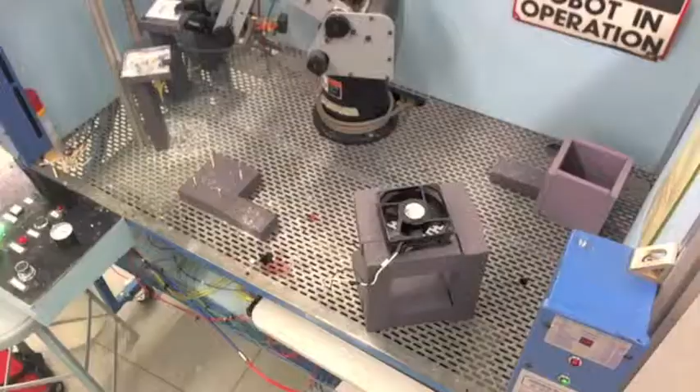Our basic procedure is to press the double-up start, which will pick up the selected mold you choose. Then you take the mold to the wax pouring station, which turns on the air valve to pour wax into the mold. Then you take the mold to the wick placing station, place the wick, and cool the candle with the fan for 1 minute and 30 seconds.

Take that to packaging, then take the candle out of the mold, put the candle into a box, put the mold back on the original spot, and loop back to start. It can run 4 times in a row before wicks need to be replaced, thanks to our variables.

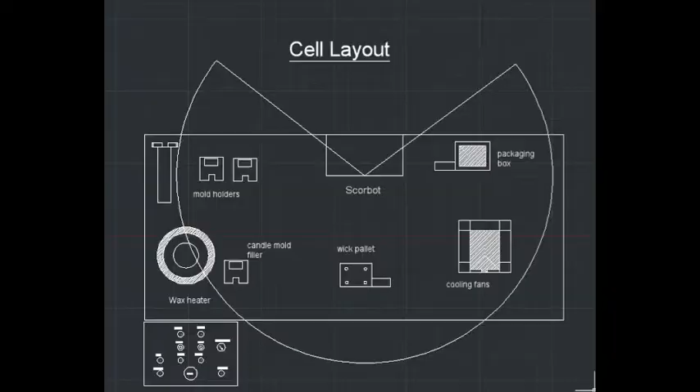Which leads us to the explanation of the Workcell layout. Our Workcell consists of mold holders, molds, a wax heater, wick pallet, cooling fan, and a packaging box. And to cap it all off, we have the control panel and the Scorbot.

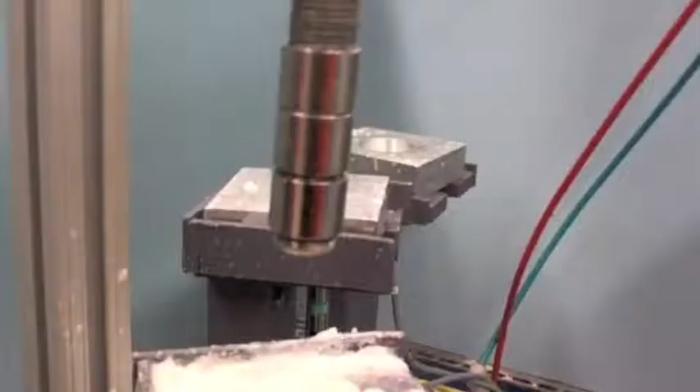One of the first, and definitely main, fixtures of our Workcell is the wax heater. The wax heater heats and maintains the wax to make sure we get the right amount to go into each mold.

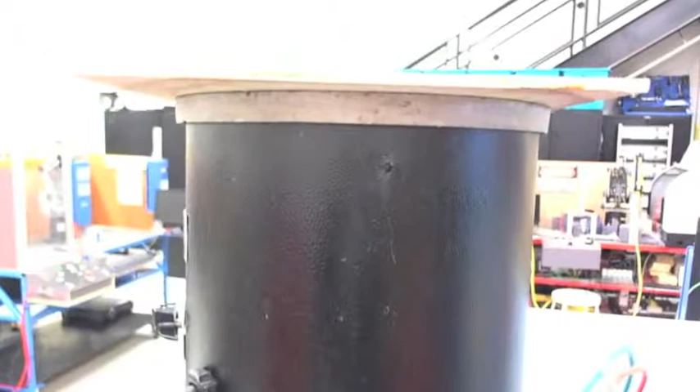As you can see, we place each mold, depending on its shape, on its own mold holder. The aluminum molds that rest on top of the mold holders are square and circle, allowing one to choose their desired end candle.

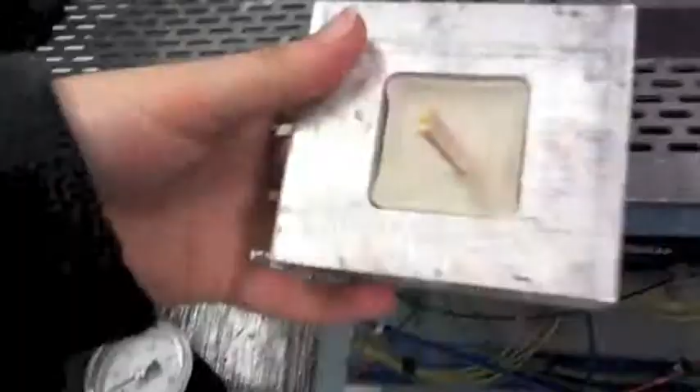Although one can't actually run the program without it, the control panel is used for all the functions in and out of the Workcell. Without the control panel, you are doomed.

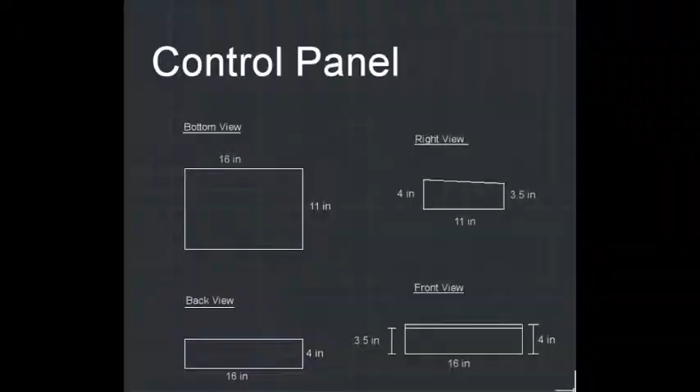A double-op start and e-stop are used to start and stop the program. There is a red and green light that signal when the program is running and stopped.

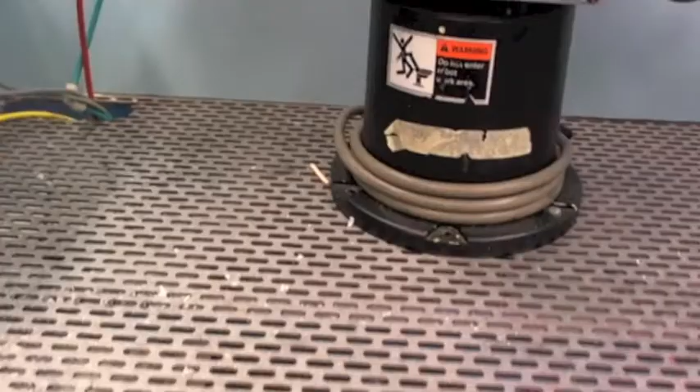While we stray to the beginning of the program, one can't forget that a wick pallet is an important part of the process. It holds 4 wicks and will reset the program when it has no more wicks left.

The cooling fan is one of the most important parts of the entire project. For 1 minute and 30 seconds, the fan will cool the mold until it is at the desired solidness and thickness.

Finally, the last part in the process is the drop box, which is where the final product is dropped and where the candles are held until the operator chooses to remove them.

You can't forget about the most important part of the Workcell, which is the safety we have built in. The robot in operation sign is the very first thing you will see, warning you to stay away from the area unless you are a certified operator.

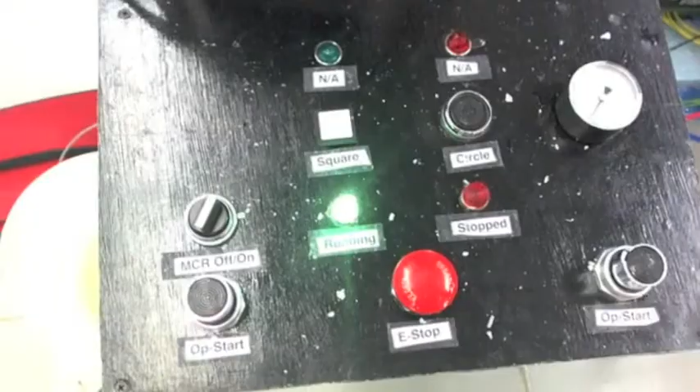Of course, for safety, we also have the operator start, which will prevent anyone from starting the Workcell without having at least 2 hands on the controller and obviously meaning to start it. That will minimize the chance of an accident happening.

Not to mention, at any time during the process, one can press the emergency stop to pause the process, at which point the robot will cause any and all outputs to be turned off.

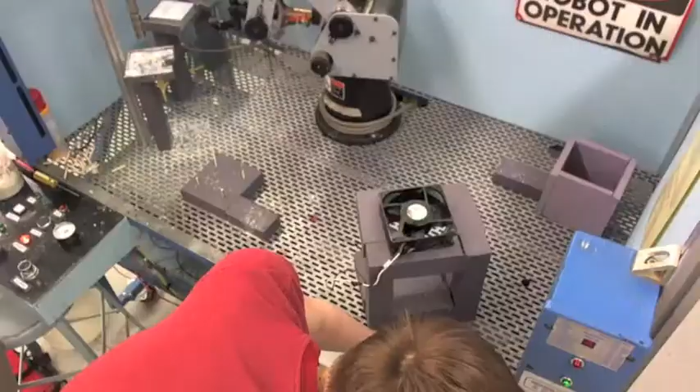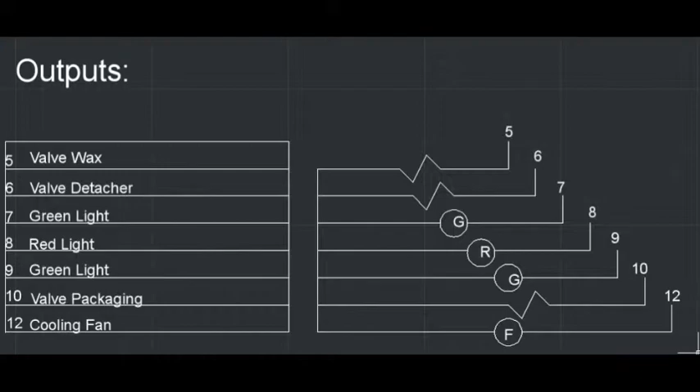In accordance with all the outputs being turned off, the same thing will occur if the light curtain is disrupted. When it comes to how the safety was created, you have to look into how the wiring was done.

The wiring is pretty simple. All the wires are labeled, and there are only 2 boards: our valve board and our prox board. The rest of the safety is wired directly into the control panel, like the light curtain and the e-stop.

Wired to our valve board is our wax filler and our cooling station. Wired to the prox board is the sensors for both the mold pickups and the wax filling.

Overall, it comes together to form 2 final processes: one with the choice of a square mold and the other with the choice of a circle mold.